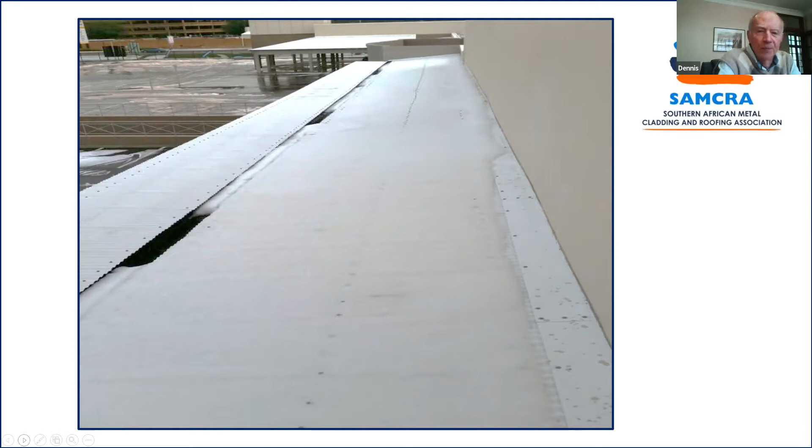Now, when it comes to hail, there's two types. You get large hail, defined as anything bigger than 20 millimeter diameter, and that type does a lot of structural damage, particularly to fragile things like glass panes and translucent sheeting. But the main thing is they're normally fairly short duration, and if they do accumulate in the gutter, because of their size, it's like a bunch of grapes - there are a lot of cavities between them, which allows drainage to take place.

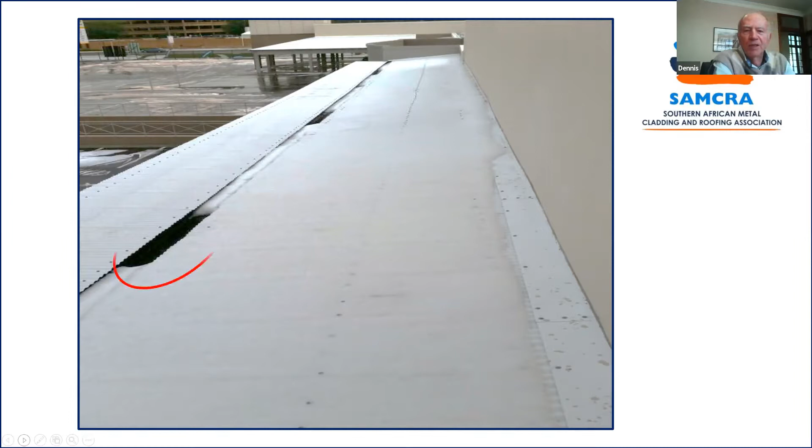Now, if you look at our first visual, this was a shopping centre out in Klerksdorp, and you can see where the downpipes are, because that's where the black holes occur. But you can see on a flat roof, the small hail accumulates, and it accumulates very rapidly. And the problem with small hail is it's normally preceded by a brief, or perhaps quite an extensive, shower of rain. So the first bits of hail that start to fall on the roof end up being washed into the gutter and block up the gutter and affect its performance.

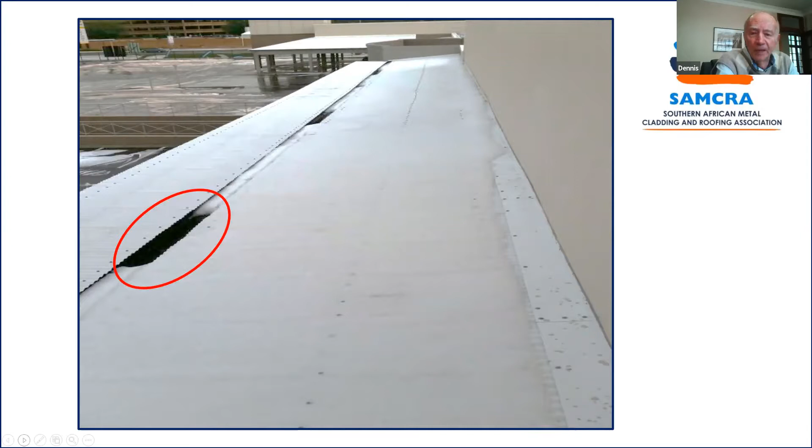And if you look at the next insert, please, Denise - this was a roof in Klerksdorp in November 2014, and they had two very heavy falls of fine hail in a single afternoon. You can see there that it ultimately ended up being around 200-300 millimeters deep. That was a guy standing on the ground, but on areas of the roof, particularly the main roof of the shopping centre, we had 200 to 300 millimeters of hail accumulate.

The other thing is that hail doesn't tend to slide off a roof until you start to get around a slope of 26 degrees. So anything less than 26 degrees, it's just going to sit on that roof. And the problem that arises there is that it freezes - it freezes rather rapidly, but particularly with an insulated roof, you get that layer almost like what's underneath a glacier. The interface layer between the hail and the cladding is where the first lot of melt takes place, and you then get flooding of the pans.

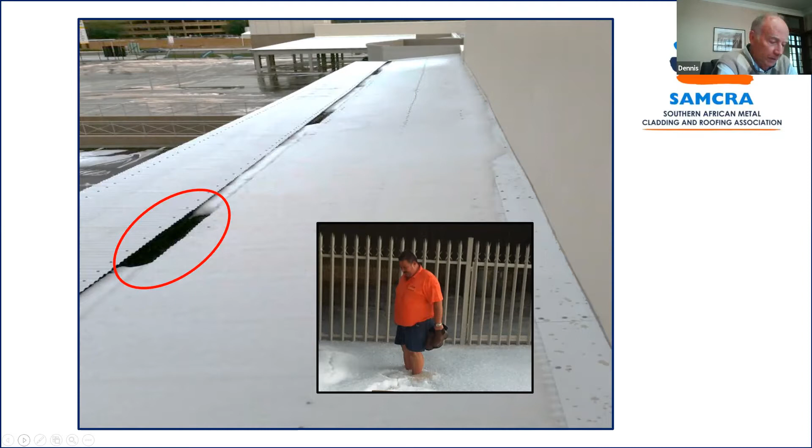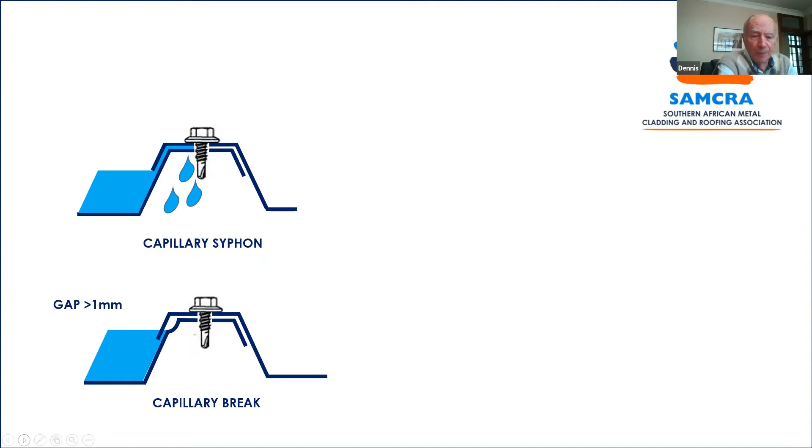And of course, with conventional pierce fix - that's your corrugated iron and your IBR profiles - once the depth of water in the pan gets to the lip of the side lap, a capillary siphon is developed and moisture gets taken into the interior of the building. Effectively, if you look at that bottom picture, to create a capillary break, you need a 1 millimeter gap, and literally a dent in the top knuckle of that one rib will solve your problem.

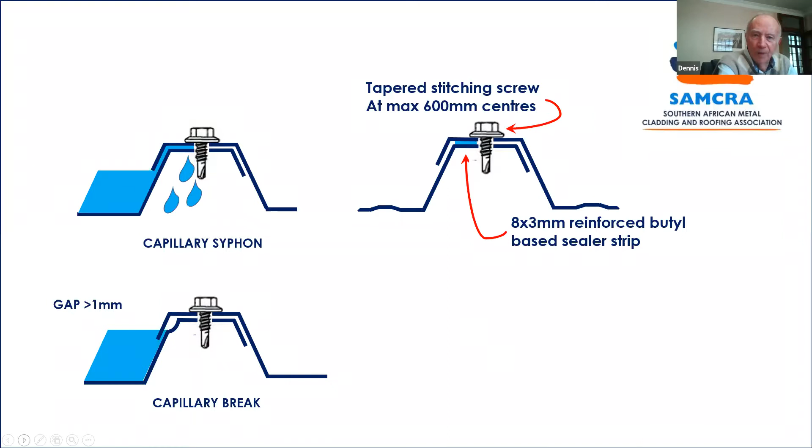So to overcome this problem, we recommend that all side laps are sealed, and there's the details of what we recommend you should use for sealing them. And then, of course, the diagram on the bottom right-hand side is a typical conceal fix, which has a built-in capillary break.

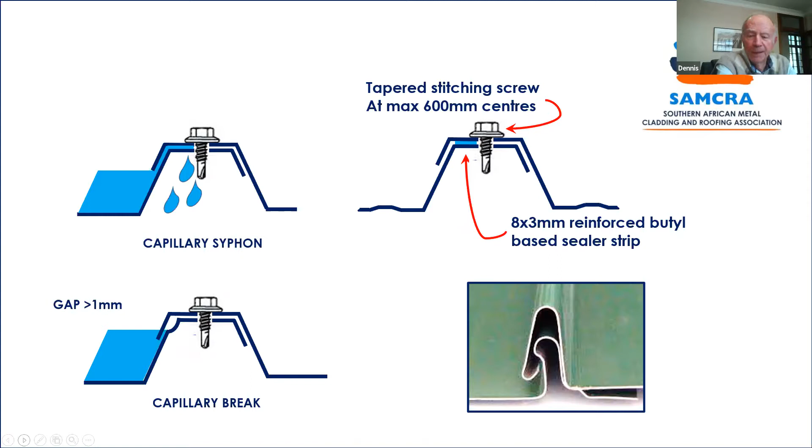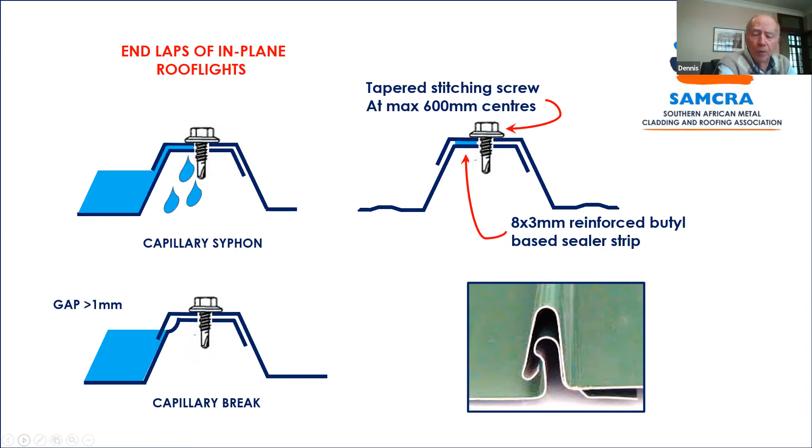The problem also arises, particularly if you've got a cantilever or exposed area under the gutter, that an ice dam will form on the edge of the cladding where it's much colder than where the insulation comes into play. That can cause even the capillary break on a concealed fix profile to be jumped. On one particular building, the whole roof was concealed fix, but one section had no gutters - it had a free overhanging edge into the car park. An ice dam formed on the end of the sheets, causing a blockage, and the roof started to leak from the gutter back up into its ridge. So in extreme conditions you can challenge the capillary break on a concealed fix profile.

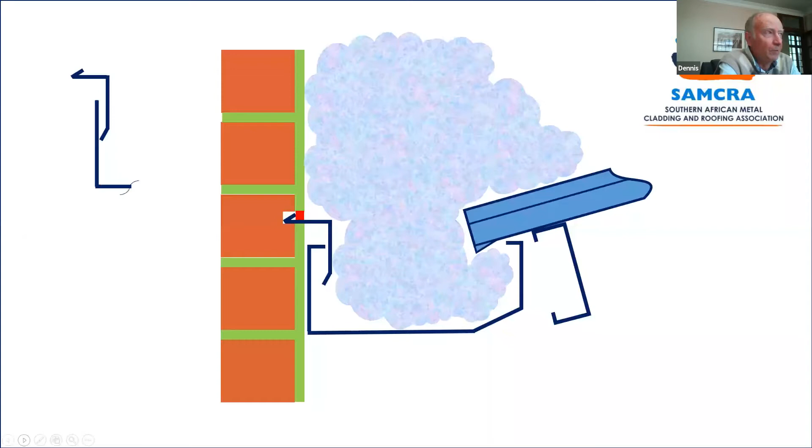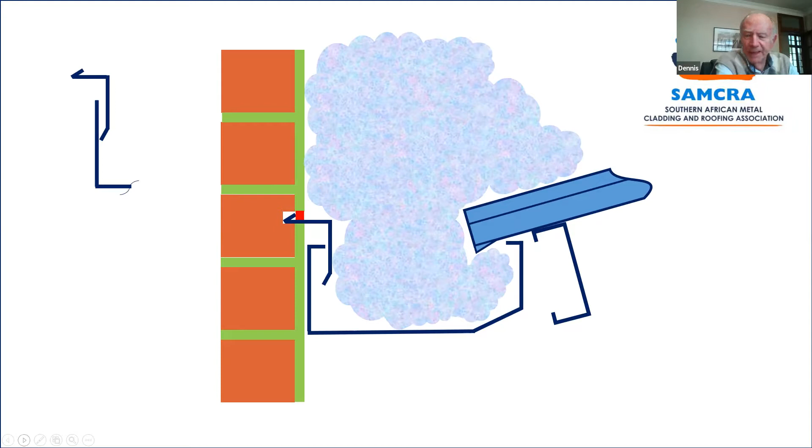The next important thing to remember is that very fine hail tends to form in drifts. This diagram shows an example of hail that has drifted behind parapets or against walls where a building protrudes. If you've got a single-story roof adjacent to a double-story building, it all tends to collect there, and the gutter becomes dysfunctional.

You run the risk on that very edge of the sheet of an ice dam forming with the hail. Please note that if the gutter doesn't have a return - top left-hand corner - make sure the counter flashing into a gutter with a normal upstand has the lip in, not out. It's vitally important to create a capillary break at that interface.

The other thing you don't do, when you have a gutter abutting a wall, is use a torch-on counter flash or one of these paint-on pap-and-lap type things. The reason is that the counter flashing and the brickwork it's fixed into are pretty inert from a temperature point of view, whereas your gutter is moving around thermally.

If you tie those surfaces all together, the thermal movement in the gutter is going to rip the torch-on or the pap-and-lap off the surface and create a leak point between the upper edge of the gutter and where the pap-and-lap or torch-on membrane is attached.

Right, and let's talk a little bit about the location.

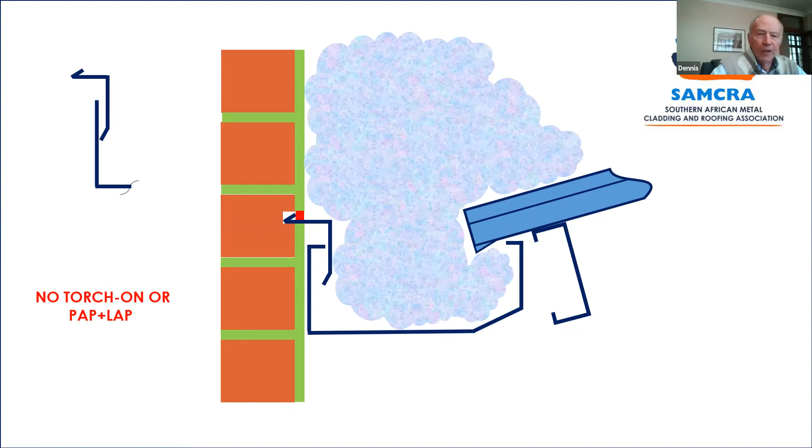In the 1960s and 1970s, most hailguards comprised basically what can be described as a hinge, where you had a metal bar frame with some mesh tied to it, and it fitted into the gutter like that. But unfortunately that particular type of hailguard has a lot of comebacks.

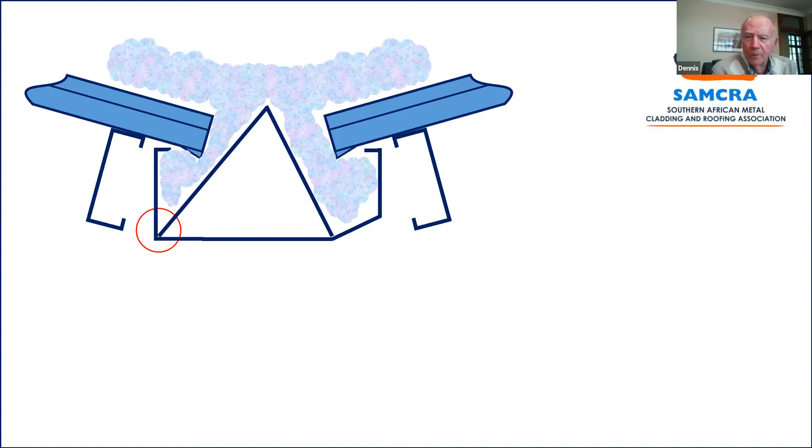First of all, it becomes very popular for tradesmen to walk on, so they tend to walk off the roof. But more importantly, you've got to be very careful, because if you get a gutter filling up to its brim, you're going to get flow back into the building. That again happens when you get ice with that hinge-type hailguard.

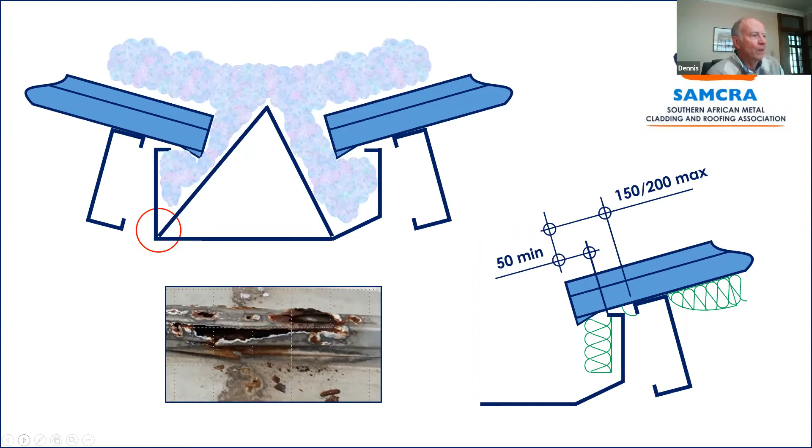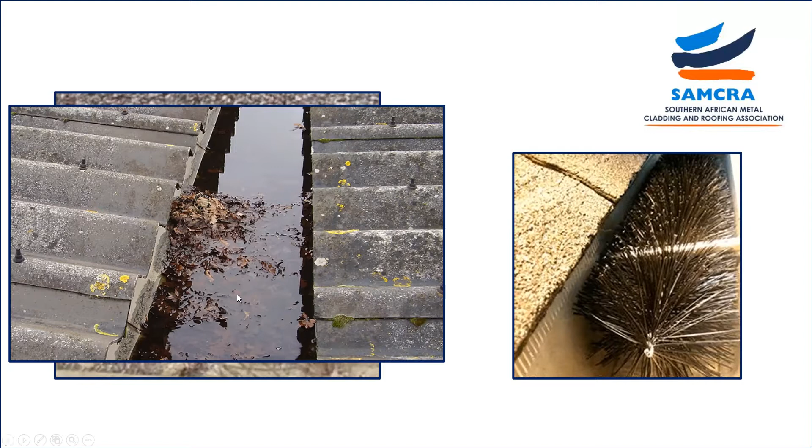The image on the right shows one available solution, like a king-size bottle brush that you put in to keep things out of the gutter. But of course it takes up a lot of your gutter capacity. That won't work - we use that as a fish tank filtration element, and trust me, it'll fill up with gunk very quickly.

You could consider the dust that accumulates on a roof inland during the winter months, and then we get a heavy dew point, you've got a fair concentration of mud. We've had experience where the outlet into the downpipe, if it's not via a cone, just a straightforward hole down into the downpipe, actually blocks up with dust and cements across, and you actually get plants growing in it. So keep the stuff out as much as you can.

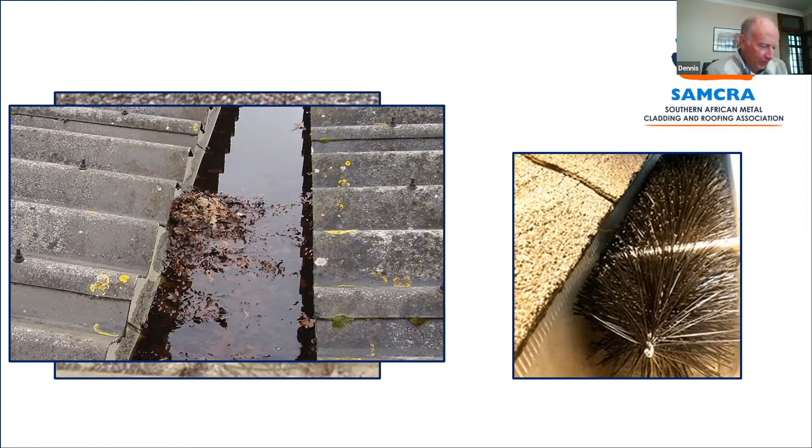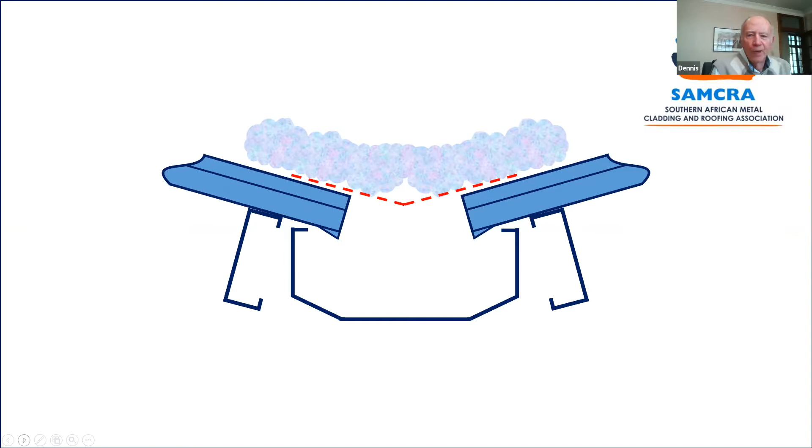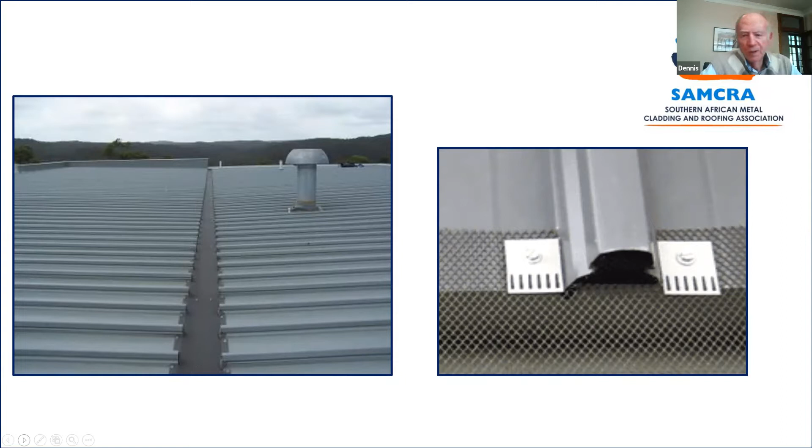Right, so if we go to the next one, here is an example that comes from New Zealand, this is the type of Hailguard they've used there. If you look at the image on the right enlarged, this is actually a plastic mesh, and it's clipped on with that metal button, I guess is the best way of describing it, that's got spikes that grip the plastic. The problem with that particular type of Hailguard, and that's a concealed fixed profile you can see there, is that the end of the rib is open. And once again, you run the risk of stuff getting into that opening and flooding the building and skipping the gutter altogether. Okay, go on to the next one.

This is a suggested detail, not a definitive one, but it's meant to make people think about what's needed when designing these things. You can't have your hailguards installed above the surface of the cladding until the cladding itself is installed.

And you can't have them installed on stalks. You could have a beam spanning, or a piece of angle spanning across your gutter with some upstands that you attach your hailguards to.

But then you run the very real risk of damaging the sheets during installation, particularly the undersurface and the protective coating on it, which could present corrosion problems further down the line.

You also need to avoid getting interference with the surface of the gutter, because if a metallic surface touches the gutter surface, you create a crevice, and crevice corrosion is very aggressive. It will rapidly strip the zinc coating from both the gutter and whatever is standing in it, not to mention the risk of anything in the gutter blocking the flow of water, with debris getting into the downpipe outlets.

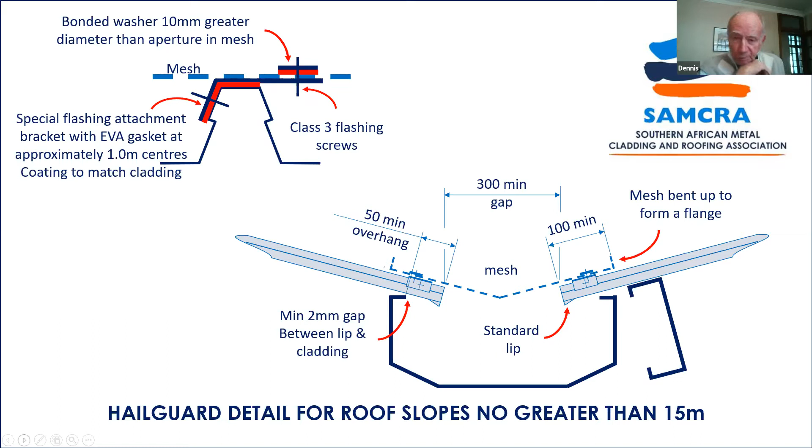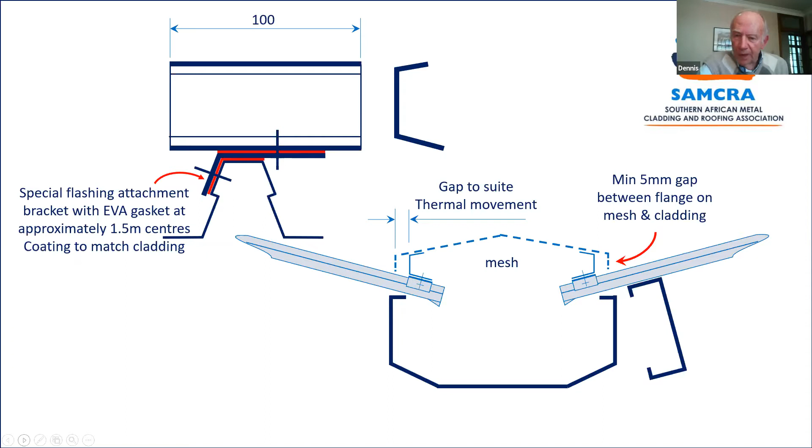If we go on to the next one, this is an alternative. You have little channel fittings that you attach to the rib of the cladding, spaced every 1.5 to 1.8 meters apart depending on the mesh used. Then you bend your mesh to look very much like a ridge flash and let it float on top of the channels, so the sheets can move underneath independently without any interference from thermal movement on the hailguard or its supports.

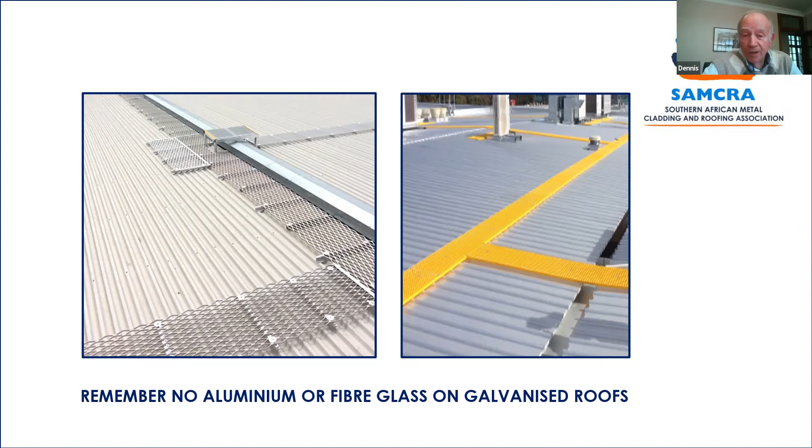Right, next one. Now, when it comes to materials for hailguards, you have to look at durability—they can range from plastic mesh, as I spoke about earlier, to chicken mesh laid on top. The big issue, and you must not forget, is that hailguards have to be removable to facilitate cleaning and servicing of the gutter, since its surface will need to be recoated from time to time. So you need to be able to take these hailguards off—that's something you need to consider.

Looking at materials, the most common one is expanded metal. Mentis makes a product called Mentex 99, which they claim is specifically for hailguards, with an aperture of 13 by 38 diamond.

The problem is, expanded metal cannot be hot dip galvanized. So you're stuck with it either painted, or in the case of the Mentex product, they punch it out of pre-galvanized material, 1.6 pre-galvanized material. Now there's a correlation between the size of the apertures and the thickness of the coating as to how long you will get cathodic protection on the cut edges of that diamond mesh or expanded mesh, before you get an onset of rust.

In my opinion, expanded mesh rolled or manufactured from pre-galv is going to rust pretty quickly, and you'll probably find that you only have a life of 5 to 8 years in a corrosive environment before that mesh has rusted completely and is starting to attack your metallic coatings on your cladding. So if you're going to use expanded mesh, you're going to have to give it a pretty good paint system, and the old gungy black tar stuff that they used to put on is pretty effective there.

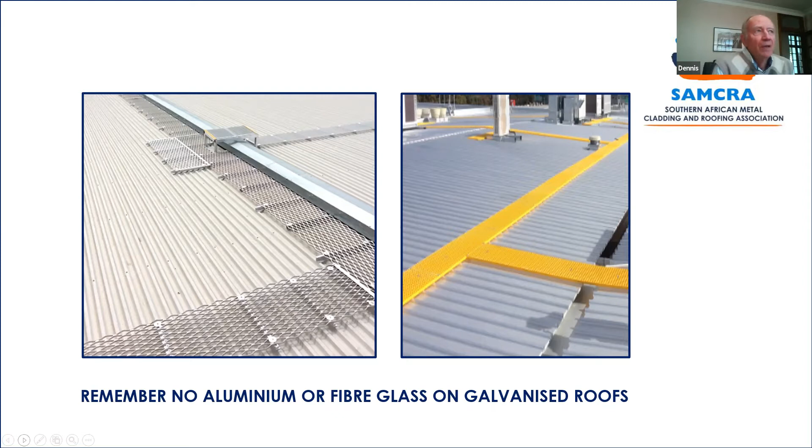Another material you can use is woven wire mesh with apertures up to around 20-30 millimeter diameter, woven from 1.6 millimeter diameter galvanized wire. Now again, anything pre-galvanized has a coating at best of Z275, which amounts to around 19 microns of coating. By comparison, a hot dipped galvanized surface has between 60 and 80 microns. So that gives you some idea of how thin that coating is, and your expected life in a moderately corrosive environment would be 10-12 years before it started to rust.

Just finally, alternatives you could consider are these expanded walkways. Most of them are aluminium, so they're pretty expensive, and again you can't put them on a galvanized surface. Or the yellow ones shown there are fiberglass - they are very durable, but unfortunately expensive. But if you needed a walkway, particularly if you've got photovoltaic panels on the roof, you can consider trying to get the walkway for the bottom access of the panel battery and the gutter Hailguard all in one.